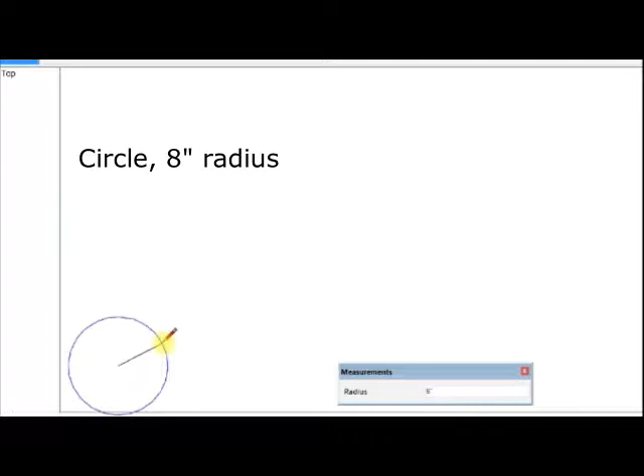This video will take us through a construction detail, which is a series of drawings on a detail of the landscape plans that we're working with.

First, we do a circle 8-inch radius, that's a 16-inch diameter, then a 6-inch square using rectangle, and make that into a group. It has a line across it - you'll see why in a minute. The circle and the outline are also made into a group.

Now we want to move the square part over top of the circle part. This is the post over top of the footing.

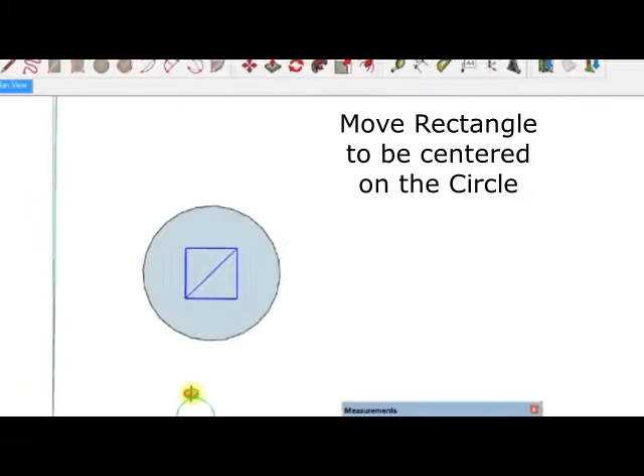Moving into 3D, going inside the group of the circle, using push-pull to move it downwards 30 inches, that's 2.5 feet into the soil.

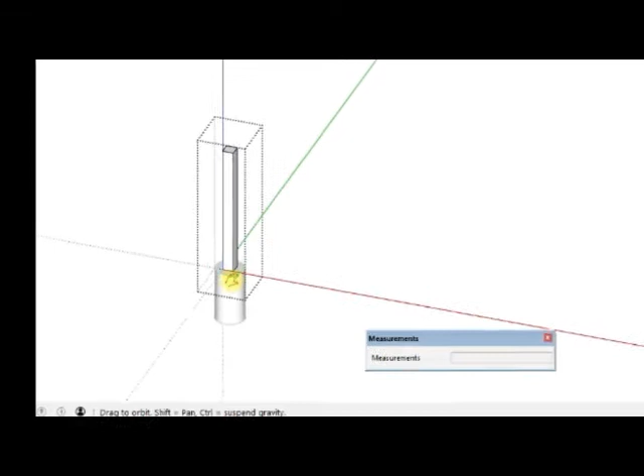Then inside the post group, taking out the diagonal line - we don't need it anymore, it was just to get the center or midpoint of the diagonal line in the center of the circle - and push-pull up 6 feet.

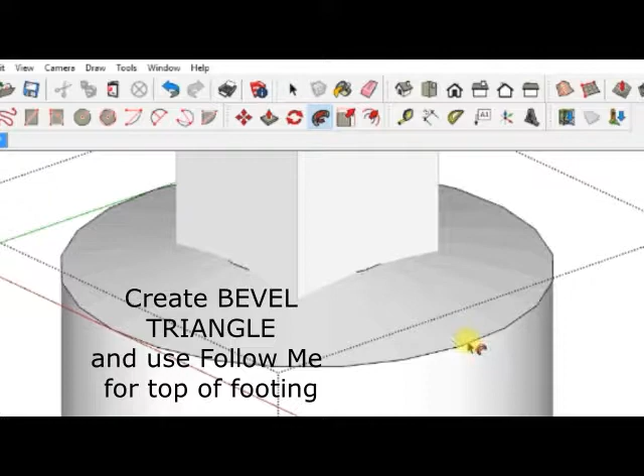This part is a bevel on the top of the footing. It's 1 inch high, and it's just a triangle that we use follow me on. Click on the face, click on the line we want it to follow, see how it catches that, makes it red, and now we have a slope on the top of the footing to shed water.

Since every type of fence will be different, this is just an idea of how you might go about it.

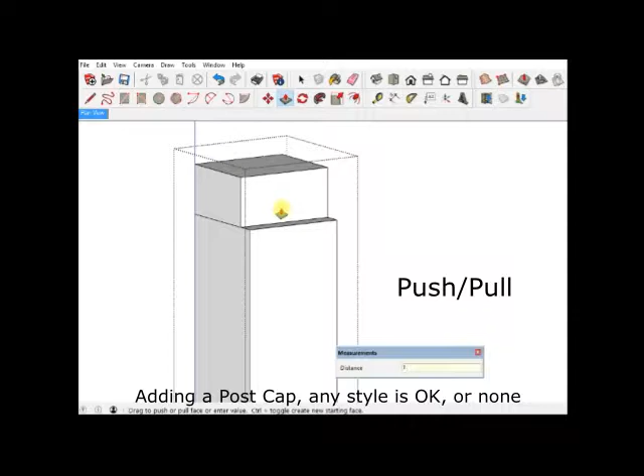At the top of the post, we're going to push-pull with the plus sign, so we're adding some inches onto it, and we're going to make that a narrow piece by using push-pull, pushing it back 1 inch. So from the 6x6 we're now down to 4x4.

We can erase those extra lines - they don't need to be there. It just makes it easier for us down the road when we want to do things.

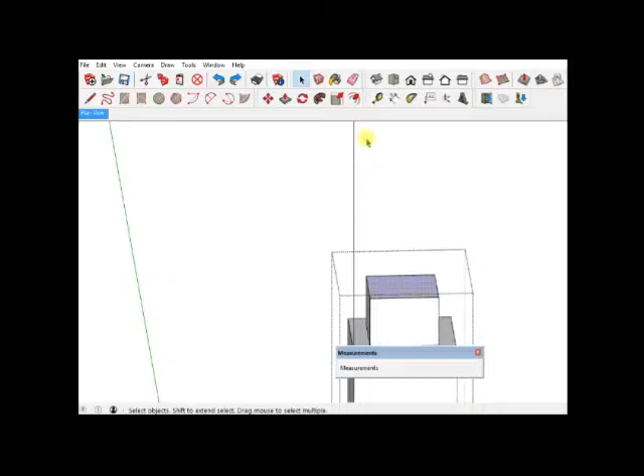On the top, we want to have another piece - these are also called finials. This is usually a part that you can buy and add, but we're building it here.

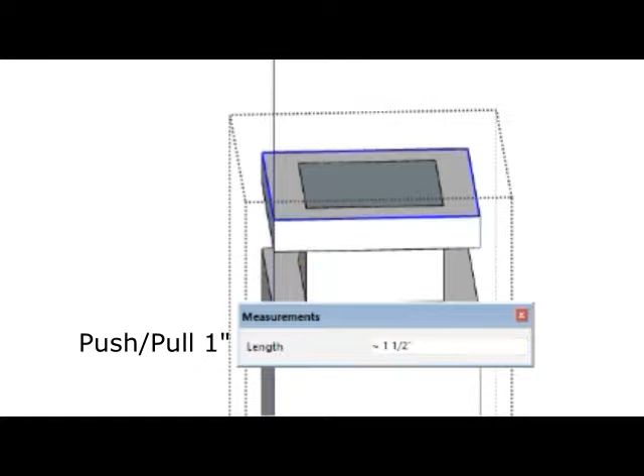Just offsetting the very top plane 1 inch to give us some width outside of that centerpiece, pulling it down 1 inch. Next we'll draw some corner lines because we want to have a slope on a part of that.

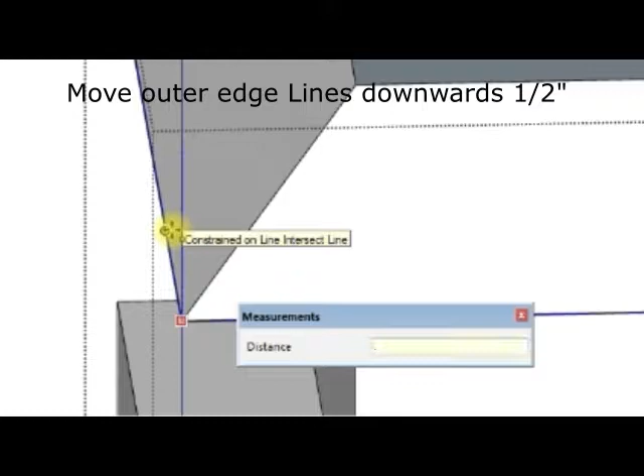So once we do that, you see there's still highlighting of that exterior line. I'm going to move that line down on the blue axis half an inch, and so we have a post cap completed.

We're going to move that down. So with a window, I'll capture those parts and just move it down so it's a little more squat on top of the fence post.

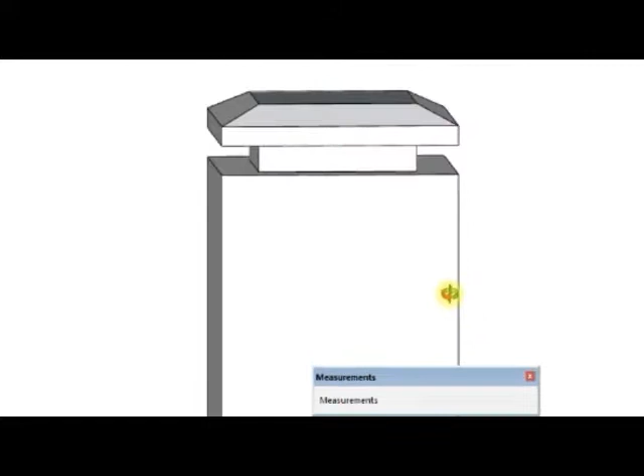With tape, we'll just move a line down on the outside of the post group. I want to do the same and copy it down, but it didn't work this way - it's given me a guide point the second time.

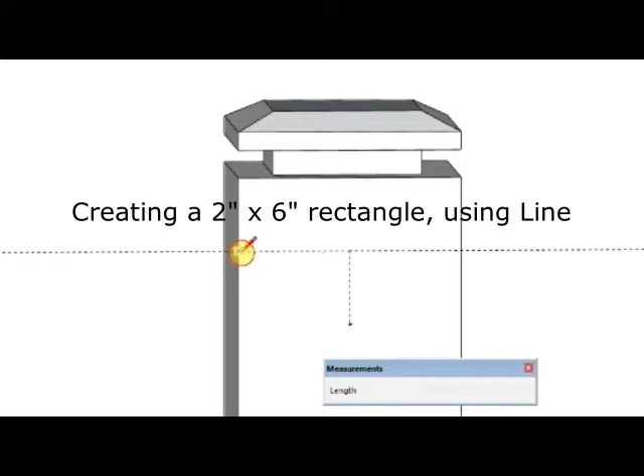Nonetheless, I'm still going to draw a 2x6 rectangle. I'm going to use line for that. It seems to be jumping to the 2-inch lengths - that's fine. Made it into a group.

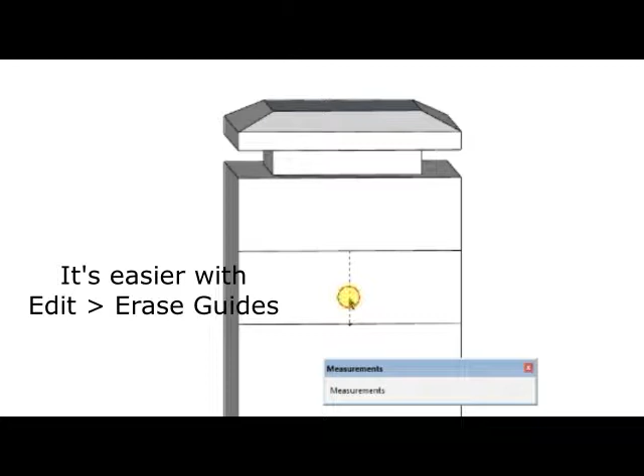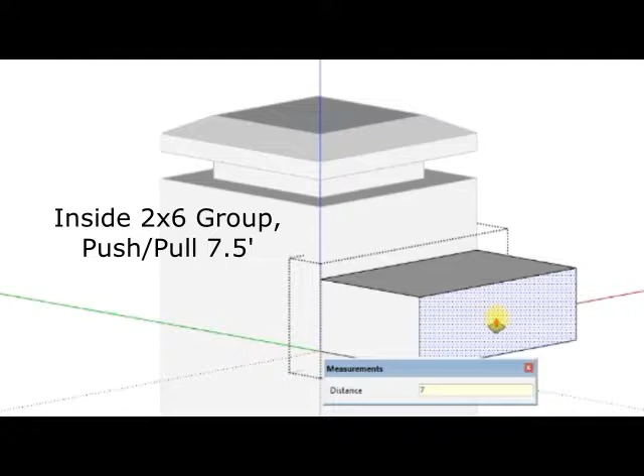Now I'm going to use Edit, Erase Guides - the easiest way to get rid of the guides. Going inside the group of the 2x6 stringer, as it's called, I'm going to push-pull it 7.5 feet in length. That creates the top of my fence panel.

I'm copying it, moving it down towards the bottom. I haven't put any dimensions on that part of it yet - it could have dimensions, but that has not been done.

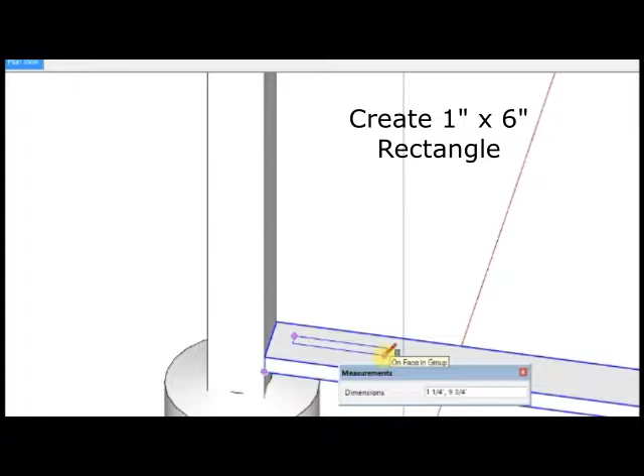Now creating a 1 inch by 6 inch rectangle for the vertical boards, that's flat on the bottom stringer. I'm going to right now make it into a group.

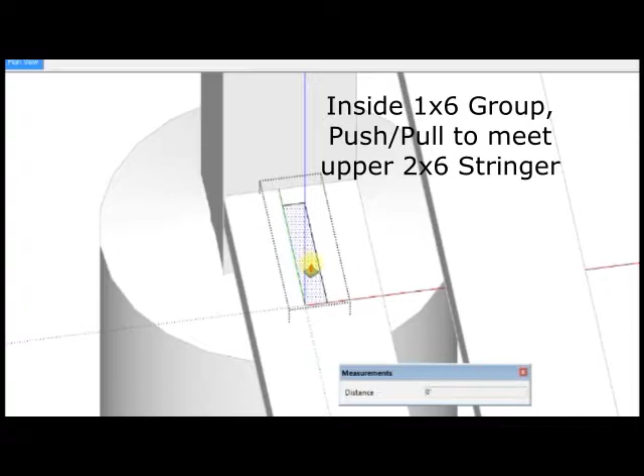And then I'm going to move it and center it on the post, so it's centered on the 2x6, and then move it away from the post a little bit so there's a bit of a space there. This will be the beginnings of our fence panel of 1x6s vertically.

I shot it up a little bit too high there. I have to bring it back down to the bottom of the upper stringer.

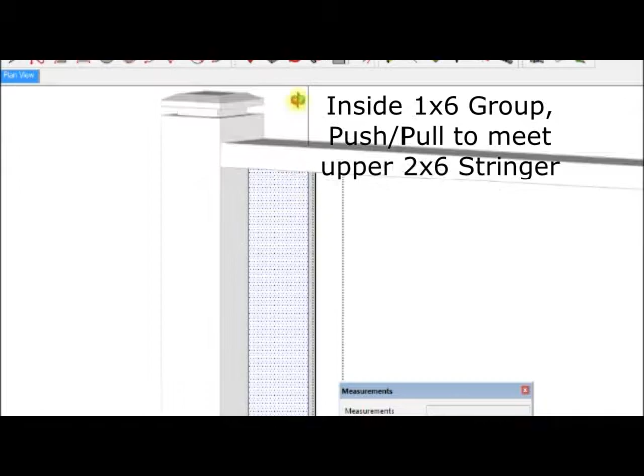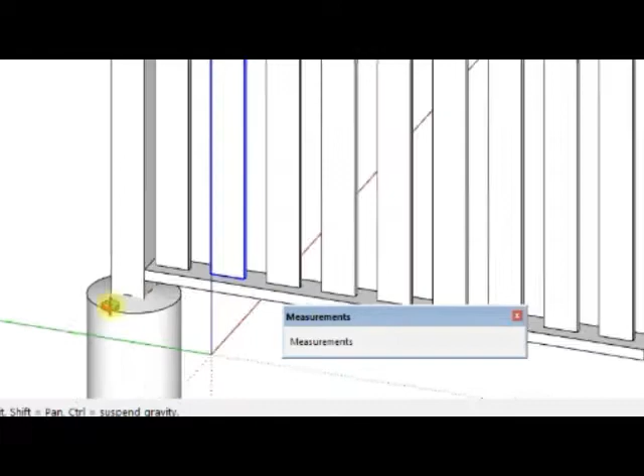So now I'm going to copy that vertical fence board. I call it an upright. It's a 1x6. I'm moving it over 10 inches on center, but that leaves a 4-inch space. That's probably the maximum you could have. Usually I'd make that 3 3/4 inches, something like that. But they're spaced out, 7 of them, for the length of the 8-foot fence. It's 8 feet center to center, so copying the post and footing, so they are exactly 8 feet apart in this case.

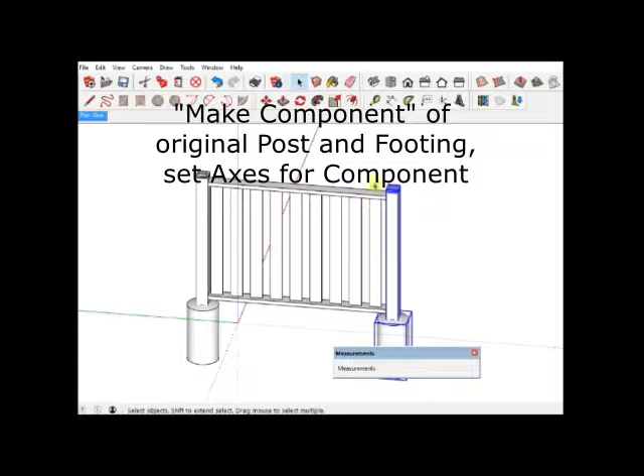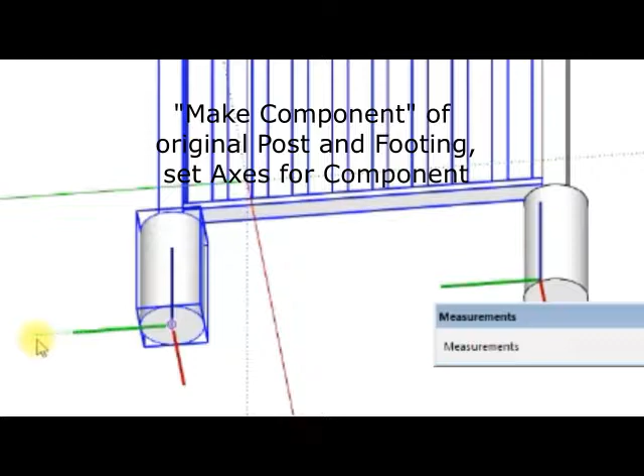Now I'm going to select the parts on the left, one post, one footing, all the stringers and all the uprights. I'm going to make them a component, Fence 1, and I'm going to set the axes. So I'm going to the middle of the footing, click. I'm going to follow red on red, and then green on green. And I have my axes set. I'm going to say create.

Now I'm looking at the standard views, which is camera standard views. So there's front, side, back, other side, and just checking to see that everything is working properly.

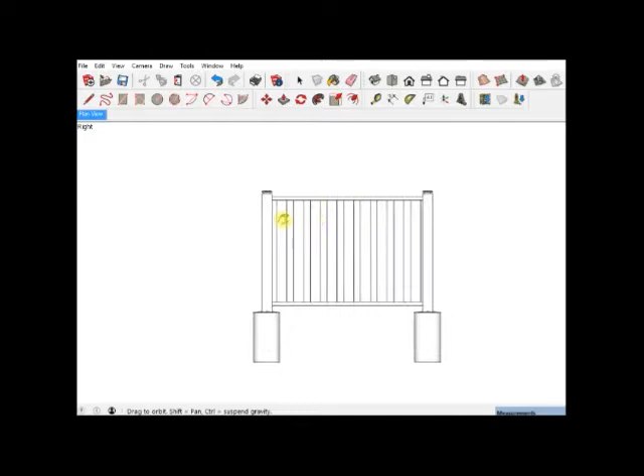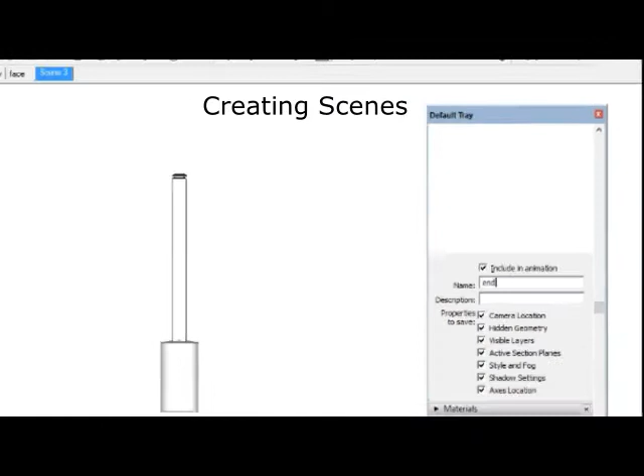I'm going to create scenes now for each of the views that I want to have. So I have one scene face on, I have one scene from the end, and I'm going to create an oblique view as well with parallel projection on, which means that I can put dimensions on it, and the dimensions can actually be measured if I have that to scale in my layout file.

So now making layers, I'm going to add text to these views. So for the angle view, the end view, and the face view, they're all going to have text, and each one has a separate layer just for the text. The model stays on whatever layers I might want to put to them. They're all on layer 0 right now.

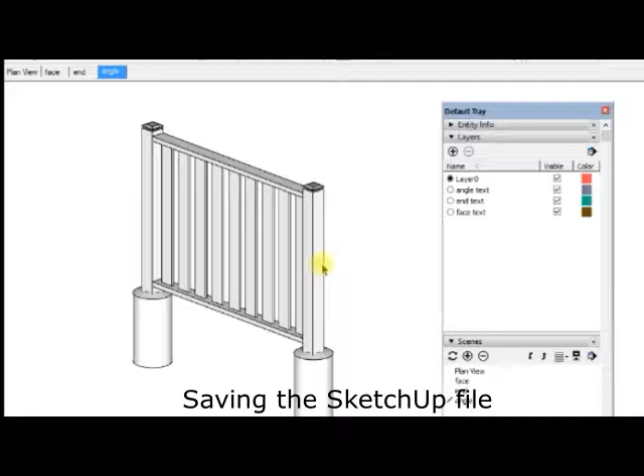I've saved the file, and now I'm adding another stringer, but it will be a rotated stringer on its edge, a 2x6 on its edge, and that is for structural integrity as well as for looks, the looks of the fence itself.

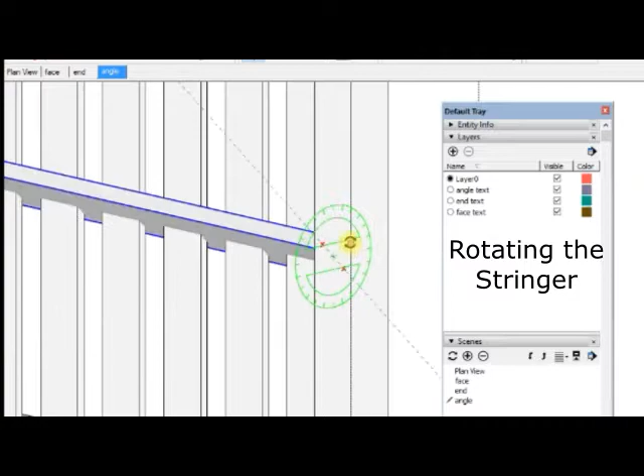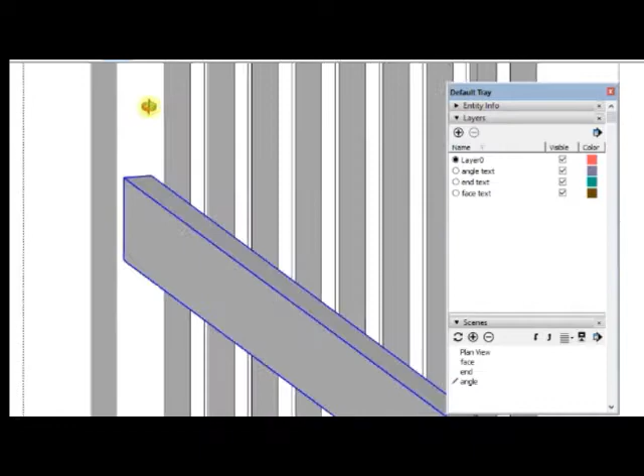Right now everything flows through. I'm going to move that out of the way, and then I'm going to bring that back right in line with the face of all those vertical uprights using the red axis, lock myself on the red axis, and that edge line touches the face. They're all lined up that way. I think I'll move it up a little bit just so it's above the center line, probably 60-40 kind of thing, 60 below, 40 above.

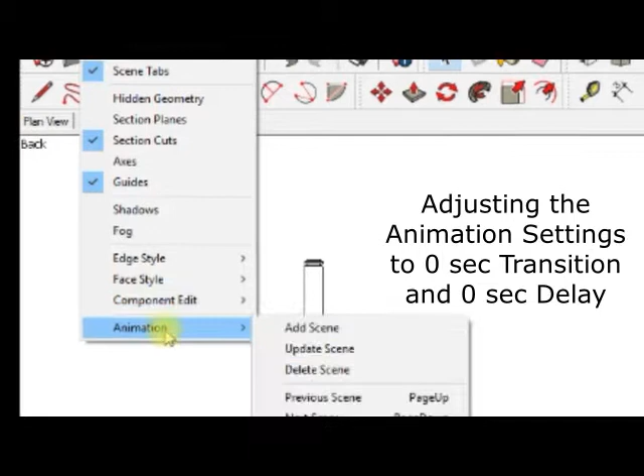You'll notice as I change from scene tab to scene tab, there's a slow transition. The model rotates slowly. I'm adjusting the view animation settings to 0 transition time and 0 delay. So now when I click on the scene tab, it goes directly there, just like a slideshow.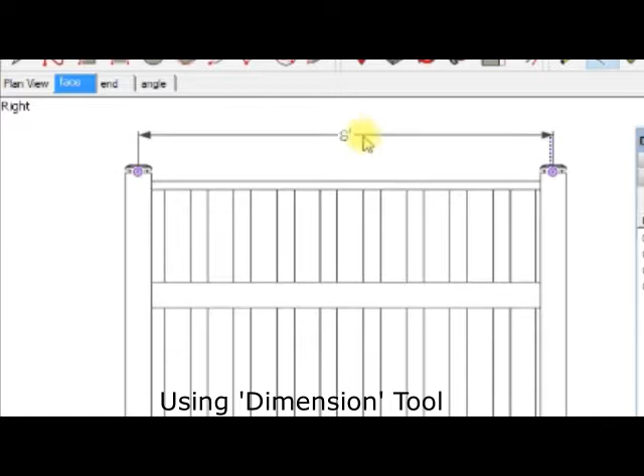So on to dimensions. We'll use the dimension tool here. We'll go from the center of the post to the center of the post. It is exactly 8 feet. So click on one end, click on the other end, move it so you can put your dimension line at an appropriate place, and then click again. This one is a little bit off because I'm using the top of the bevel. I want to use the edge, and I'll line it up by eye with the other guys here.

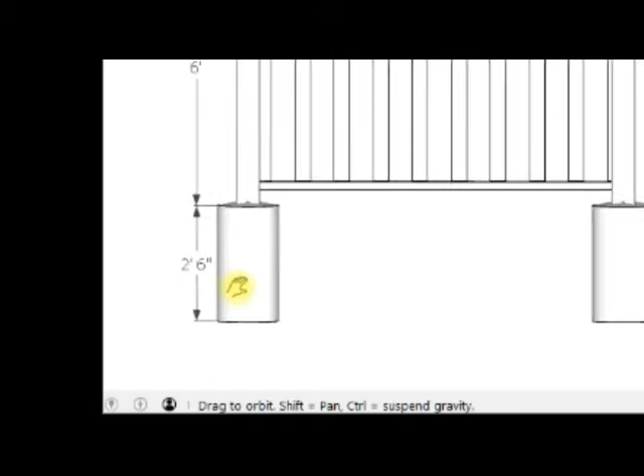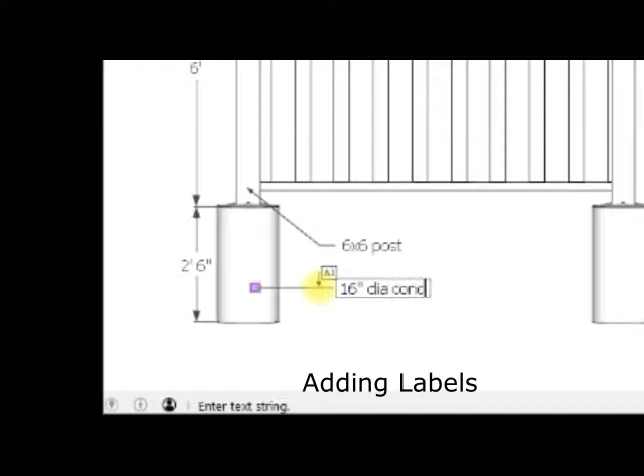2'6" is 30 inches. Now I'm adding labels. So with the label tool, I'm able to go up and click, start my arrow, click a spot where the text starts, type the text in.

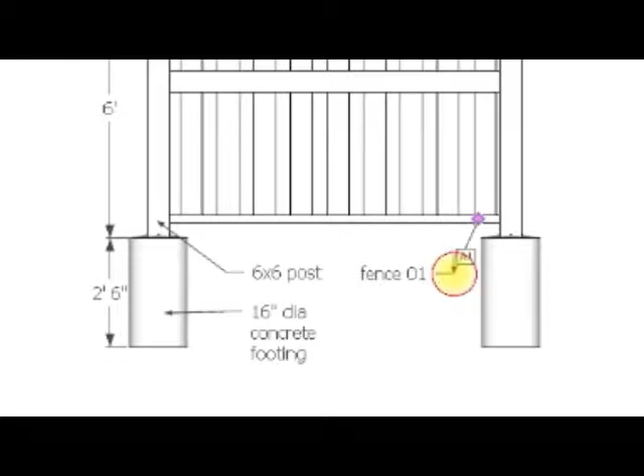Here I'm going in to zoom in close to get the center of that 2x4 stringer, and then up to the face tab. So I'm using the scene tab, face in this case, so always come back to the same place so I can see where my text is going to be. You'll see why in a little bit. So I've clicked the location for the arrow, dragged it out, put the text in.

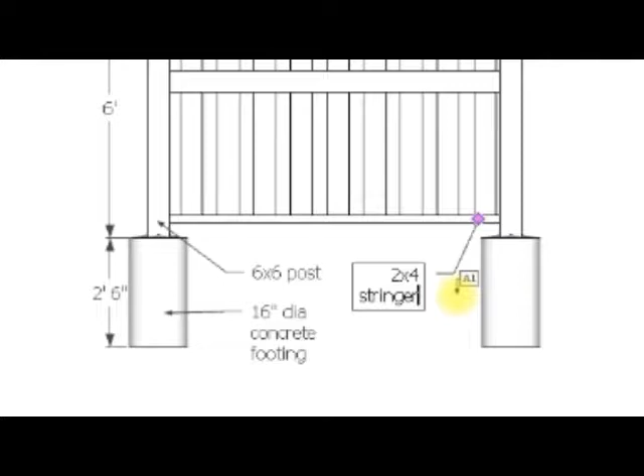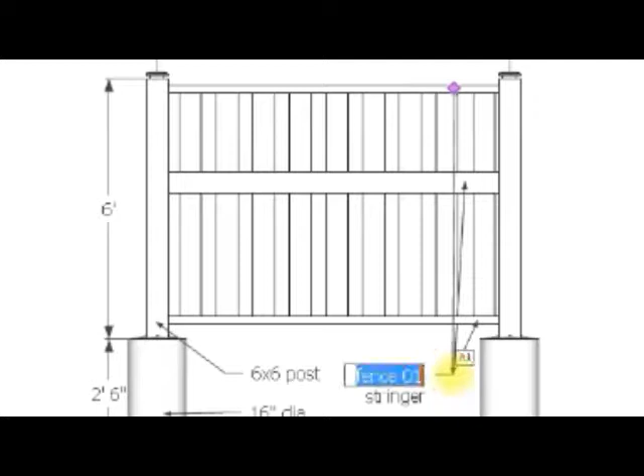I'll do the next one, which is actually going to be an arrow without text, a leader arrow for the next stringer. I'll line it up with this one, no text, so when it says text I just type a space bar, which is a null response. I'm going to zoom into that one so I can see it a little bit better. I'll go up, hit the scene, come back down, line it up, click the space bar, and then I click on the screen one more time and I can move onward from that.

Here I'm just clicking on the finial. I call it a fence cap here. It could be a post cap, whatever seems to work.

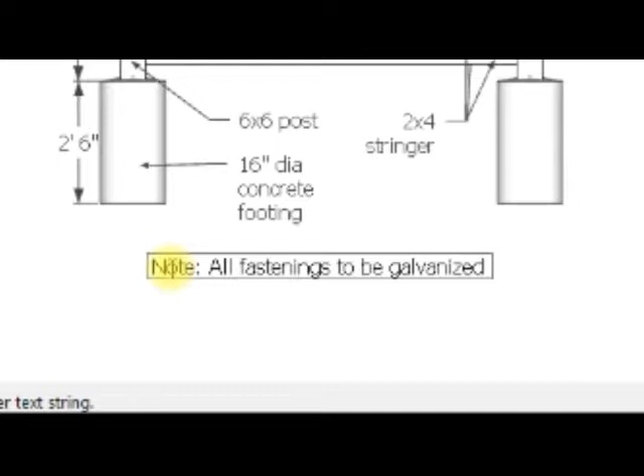Now I'm adding note information, text underneath the drawing. You'll find that the text that has no leader line is fastened to the screen, while the text with the leader line is fastened to the object. See that?

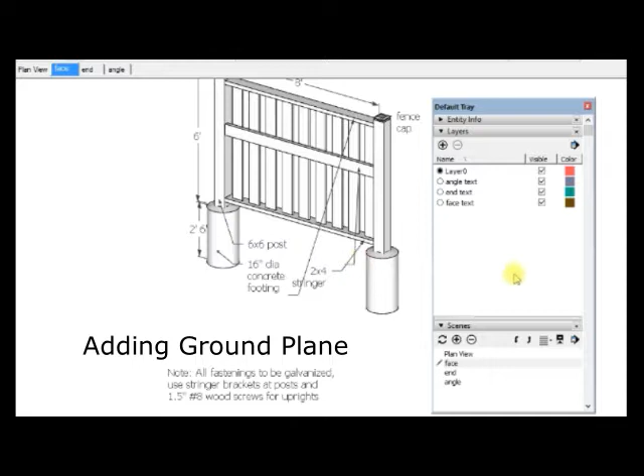Next, we'll be adding a ground plane. I'm just drawing a rectangle, and it tends to want to automatically go with the ground plane. I will add a note here that says that's the ground level for this piece of fence. If you remember, it works at just the bottom edge of the level at that elevation.

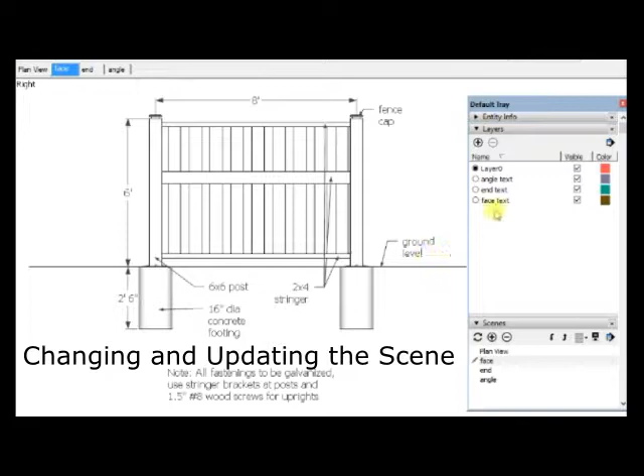Now, since I've moved things around on the screen, my text was in the way. I'm updating the scene, and so my view is going to include the text at the bottom and all those other things. Next step is for me to assign a layer to all of the text. So I'll assign the layer face text, and I can turn that on and off with my scenes.

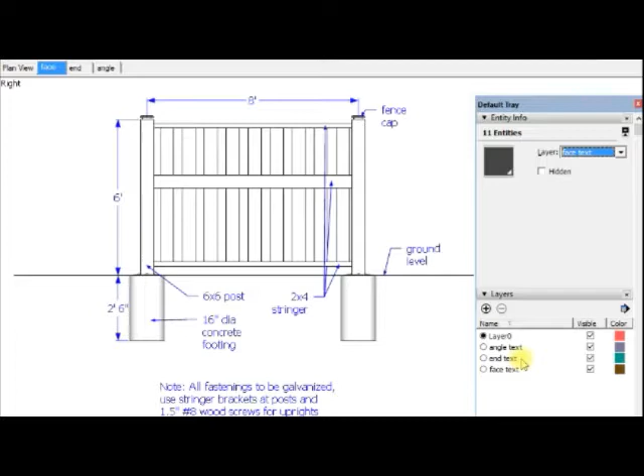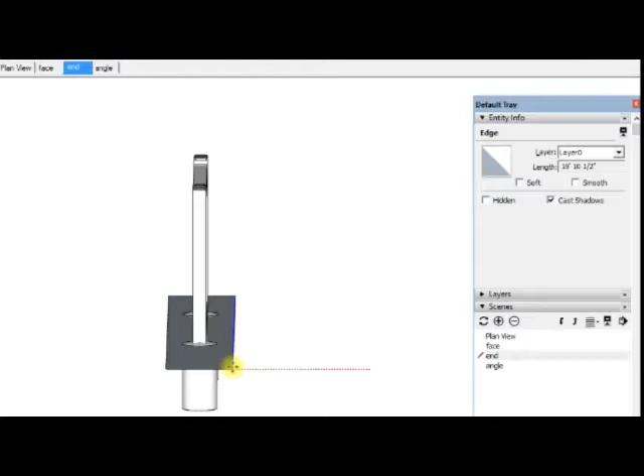So moving now to the end scene, I'm going to turn off face text and then update my end scene because I don't want that text that belonged to the other view, the other viewpoint, the other scene. I want that not on here. I'm just changing the ground plane so it looks a little bit better in this scene. It won't make a difference down the road.

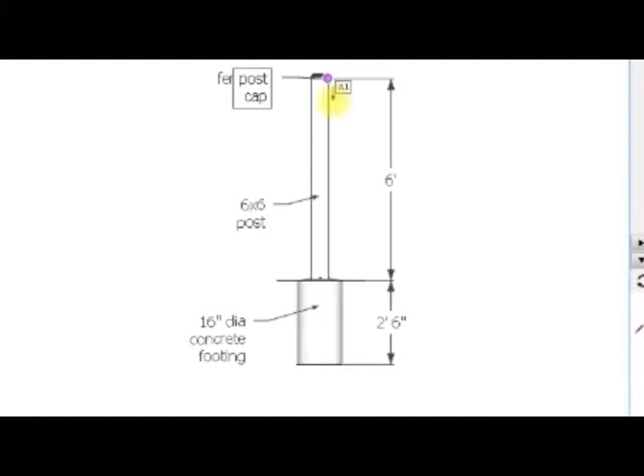Adding dimensions now, and as before, looking for the points on the model that I can add those dimension lines to. And then I'm going to add some notes, actually labels. Label has an arrow, so let's click the arrow, click the beginning of the text, change the spelling and the typing so you've got it correct.

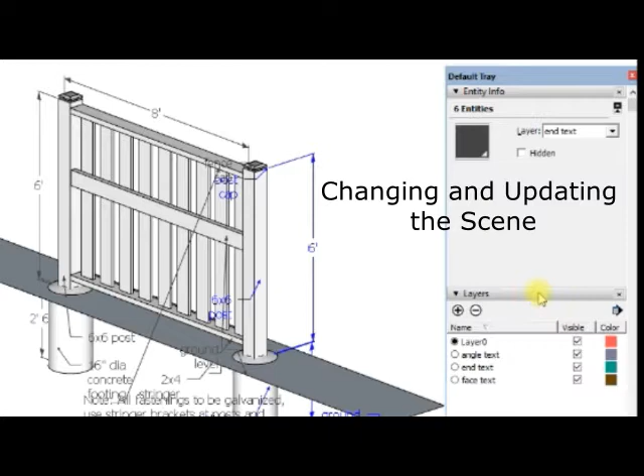And I will assign all this text now and dimensions to the layer end text, and I will have to adjust my scenes later on. You see now I've got end text on my angle scene, so I have to go in and update my angle scene again by turning off the end text and turning off the face text layers and saving the scene.

I'm going to change the ground plane extents again. I wasn't happy with them at all. Just keeping it on the red or green axis there. As I move the end piece out, stickiness allows me to drag it a bit.

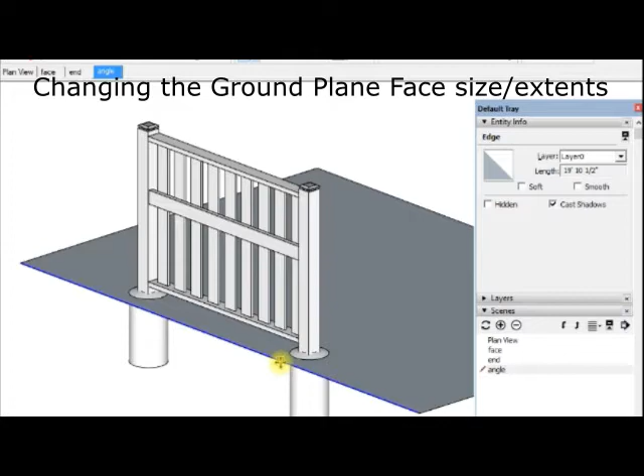And another quick step, because I do want to see my footings, I'm going to use glass and mirrors and make that translucent. So I've added that to my ground plane face.

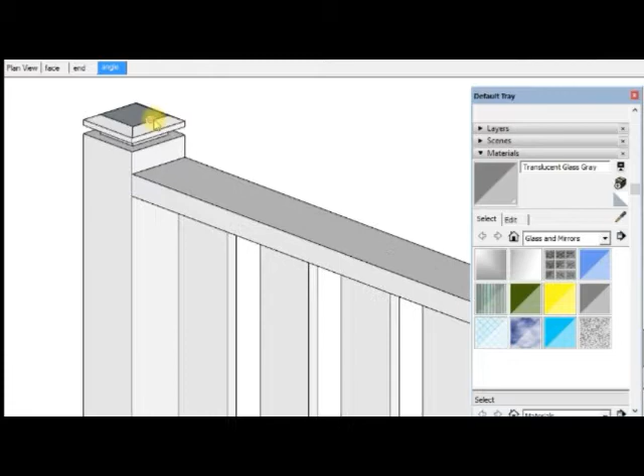For the dimensions in the angle scene, I'm going to use that top corner there, and I'll use the equivalent top corner of the other post. I'll mark it, raise it up there. It says 8 feet, so it shows the post distances on center, shows the post height above ground.

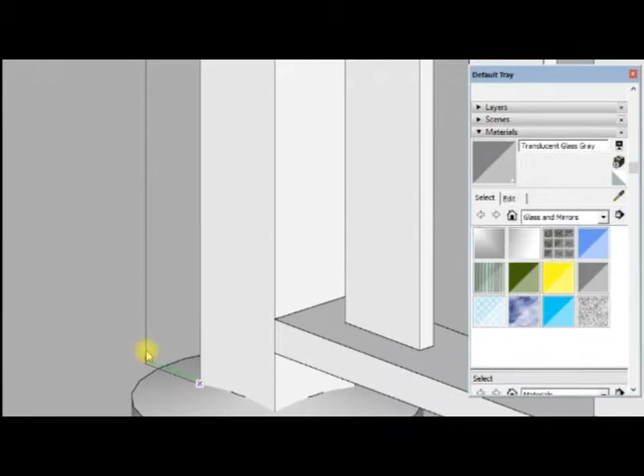In this case, it doesn't quite exactly match, so it says not 6 feet, so I'll double click on the text, type in 6 feet, and I can change my dimension text in case it's off a bit, and that happens. Next, I want to add some labels as well.

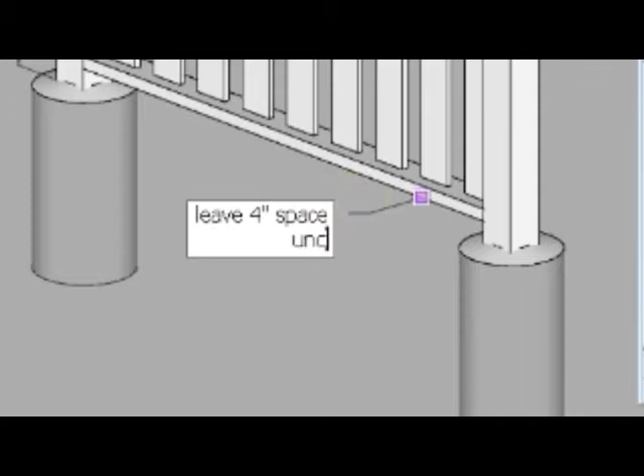So I'm going to make a note here to say leaving a 4-inch space under the bottom stringer. Make the spelling errors corrected. And note the 1-inch beveled sloped bevel on top of the footing. So there's 2 notes there on this particular view.

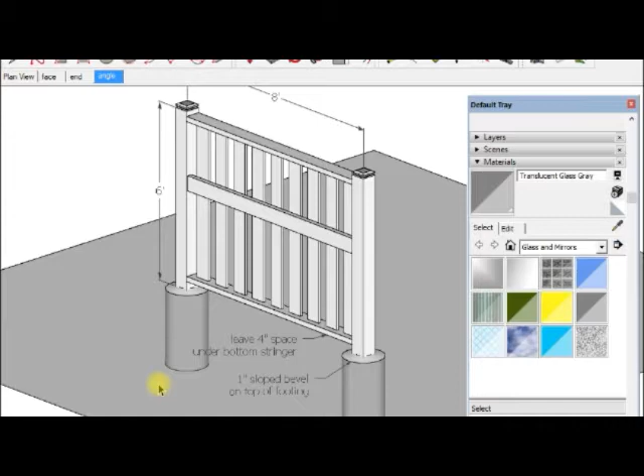The text at the top needs to be changed to say exactly 8 feet on center. O/C means on center.

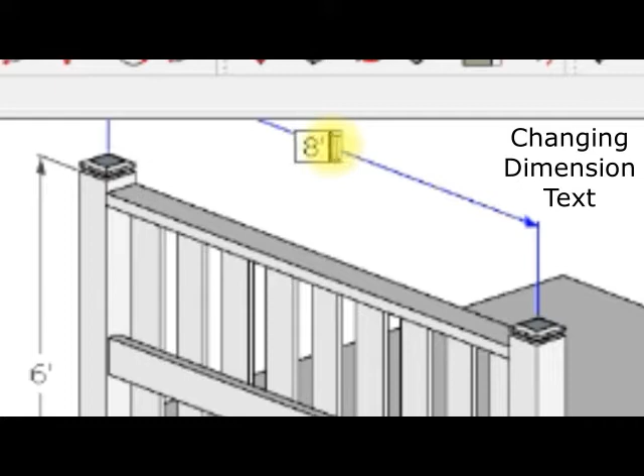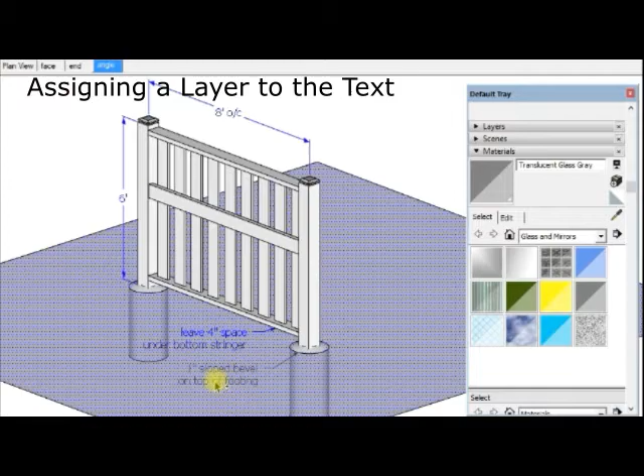Moving on to assign a layer to the text items on this scene. So a little trouble selecting that text, I keep getting the ground plane background. So I'll use a crossing window from right to left and then deselect the ground plane. Worked fine. It's going to be on angle text layer.

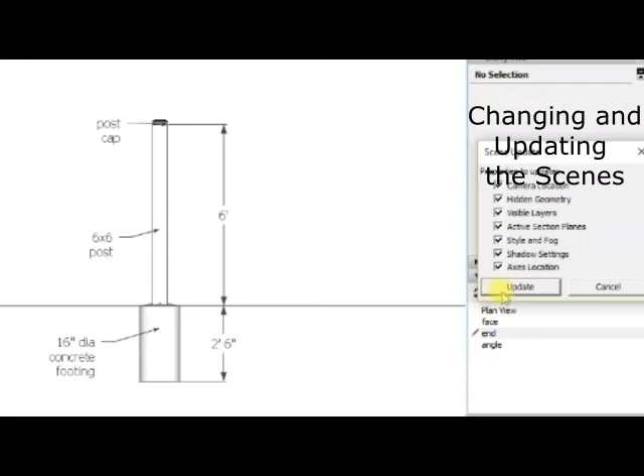So now when I move from one scene to the next, I will be able to have, once I set up my layers and update my scenes, just the text I want for each of those scenes.

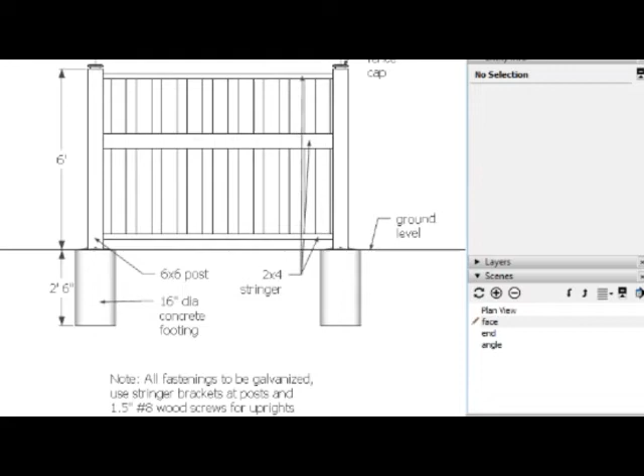This whole demonstration is done in SketchUp. Exactly the same text items could be added to model images in LayOut using the text functions there. Dimensions can also be added by adjusting the dimension automatically to match the model image when it comes in from SketchUp. This is a different way of doing things.

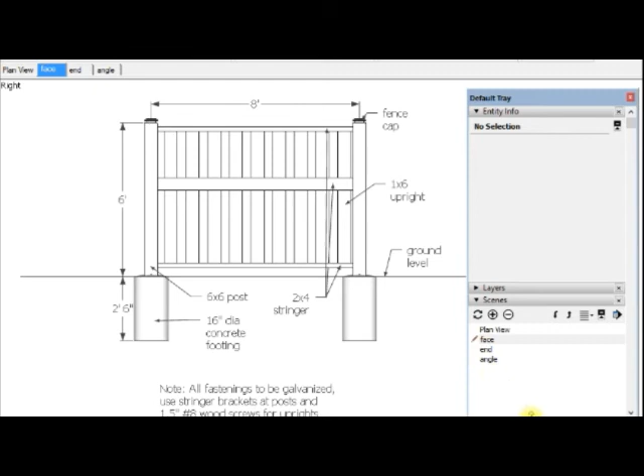Text does not work when you orbit. It must be done only in one view. And the scenes that we've made now here can be used just like they are for our construction detail in LayOut.